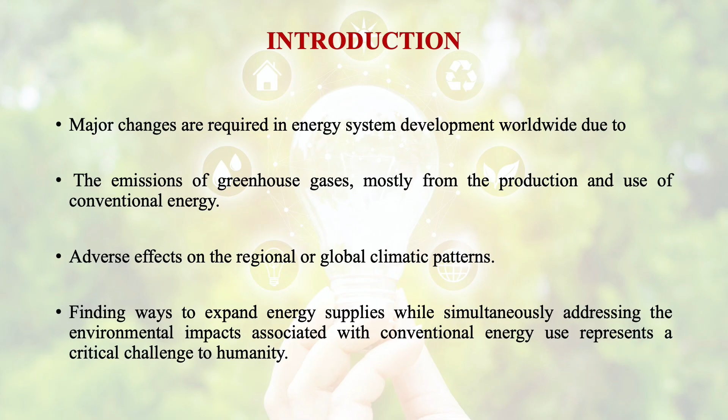Major changes required in energy system development worldwide are due to the emission of greenhouse gases, mostly from the production and use of conventional energy. These emissions are altering the atmosphere, resulting in adverse effects on regional or global climatic patterns. Finding ways to expand energy supplies while simultaneously addressing the environmental impacts associated with conventional energy use represents a critical challenge to humanity. What is the effect of energy on environment and health?

The resources and technology options available to meet these challenges are identified as energy efficiency, renewable energy sources, and advanced energy technologies. The relation between energy and social issues involves addressing the energy needs of the majority of rural people, especially the poor who cannot pay for commercially available energy.

A large majority of rural masses have very low ability to pay for energy in our country and require major structural changes. The productivity and income generating potential of a family is highly dependent on the availability of convenient and affordable energy. The contribution of a supply of affordable energy can help families and communities break out of the cycle of poverty.

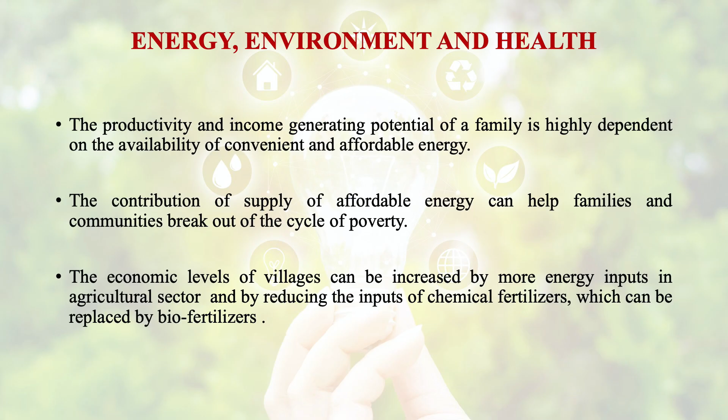The economic levels of villages can be increased by more energy inputs in the agricultural sector, such as increasing irrigated land area, and by reducing the inputs of chemical fertilizers, which can be replaced by biofertilizers such as biogas manure. So biogas is very important to make our villages self-reliant on energy.

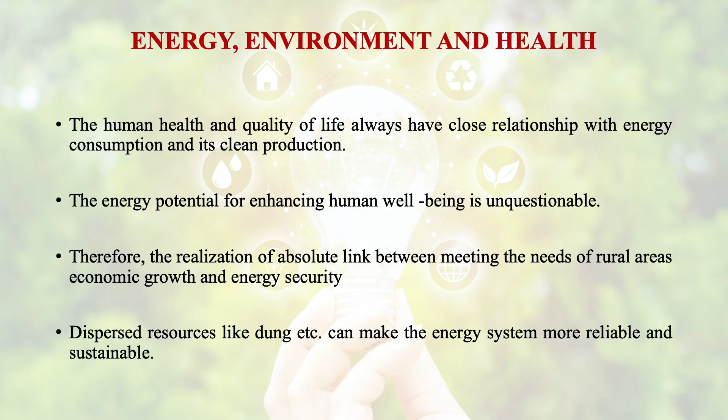Human health and quality of life always have a close relationship with energy consumption and its clean production. The potential of energy for enhancing human well-being is unquestionable. Therefore, realizing the link between meeting the needs of rural areas, economic growth, and energy security, dispersed resources like dung etc. can make the energy system more reliable and sustainable.

On the other hand, in developing countries, most inhabitants in rural areas are dependent on dung and organic residue as fuel for cooking and heating. This is the case, for example, in the treeless regions of India such as the Ganges Plain and Central Highlands, and it is not limited to India alone; the same condition exists in Nepal and other Asian countries. So the burning of dung, plant residue, and even wood is a considerable waste of plant nutrients. Burning wood is not at all a good or wise decision to make.

Other than land, labor, capital and water, energy and manure have also become crucial factors for the economic and social growth of villages. Efforts must be made to create self-reliant villages in terms of energy, with manure production as a byproduct through biomethanation technologies.

Local resources like cow dung, waste from agricultural lands, and waste from kitchens will be utilized there. This effort would provide a firm basis for economic and social development and long-term sustainability as well.

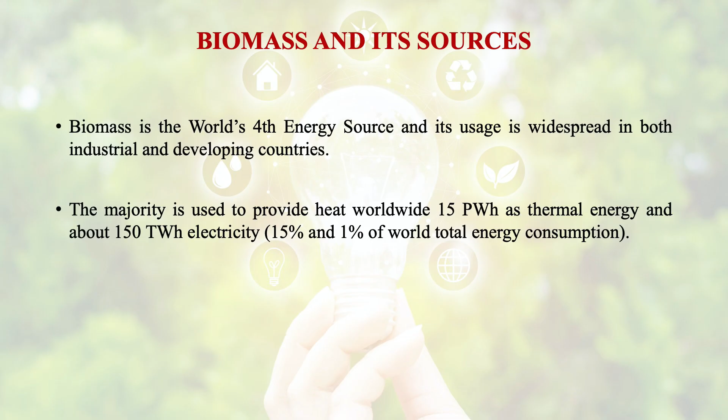As discussed in our previous modules, biomass is the world's fourth energy source and its usage is widespread in both industrial and developing countries. The majority is used to provide heat worldwide: 15 petawatt-hour as thermal energy and about 150 terawatt-hour electricity, which is 15% and 1% of world total energy consumption. This means 15% of thermal energy and 1% of electricity all over the world is provided by biomass.

The major resources which can be used for biogas production are animal manure, poultry waste, pig waste, night soil, municipal organic waste, agricultural residues, forest residues, aquatic plants like water hyacinth, organic waste water from industries such as food processing, milk processing, meat processing, hotels and restaurants, and sanitary landfills.

All these resources are generally organic waste. So what we need is a product that is organic in nature. It could be waste, because we are going to utilize waste and generate energy from the waste.

Biogas. What is biogas? Biogas technology refers to the production of a combustible gas known as biogas, and a value-added fertilizer also called slurry or sludge. The process used to produce biogas is anaerobic fermentation of organic materials under certain controlled conditions. The byproducts of anaerobic digestion are commonly referred to as biogas because of the biological nature of the gas production.

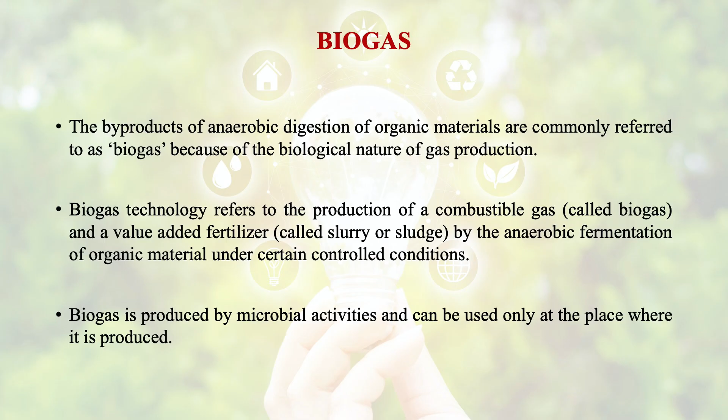It is produced by microbial activities and can be used only at the place where it is produced. Though we are developing biogas bottling plants as well, and transferring and transporting biogas in cylinders, for that we need to purify the gas and use it for the transportation sector. The best utilization of biogas at the least price is to use it at the place where it is produced, since the transportation cost associated with bottling is more.

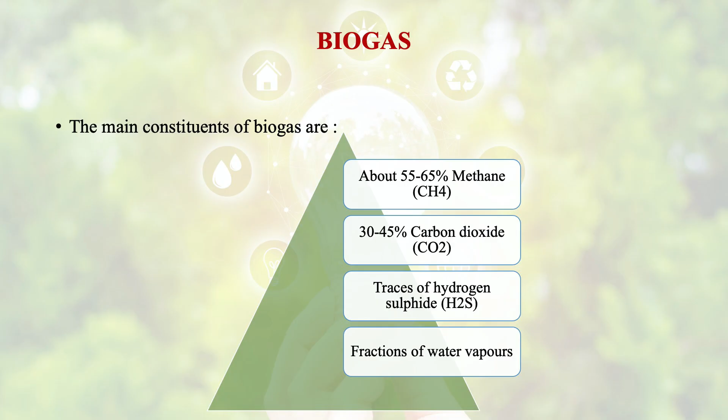What are the main constituents of biogas? Biogas consists of about 55 to 65% methane (CH4), 30 to 45% carbon dioxide, some traces of hydrogen sulfide, and a fraction of water vapor. Due to the presence of water vapor, the calorific value of biogas is somewhat lower.

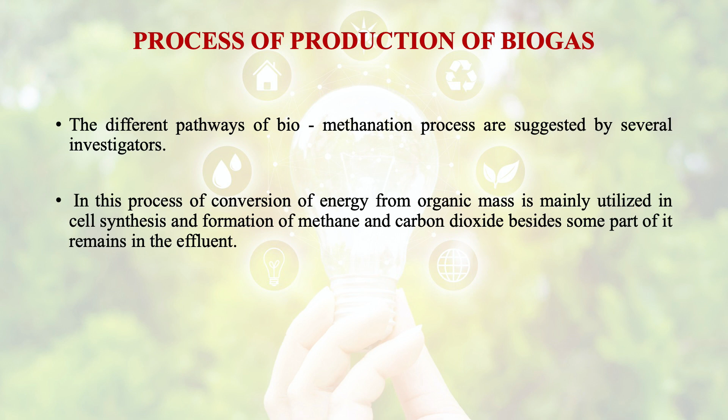What is the process of production of biogas? There are different pathways of the biomethanation process suggested by several investigators. At the macro level, energy conversion of organic waste occurs where energy from organic mass is mainly utilized in cell synthesis and formation of methane and carbon dioxide. Besides, some part of it remains in the effluent.

This process of biomethanation consists of three processes. First is hydrolysis, in which saprophytic bacteria convert complex organic compounds into less complex, water-soluble organic compounds. Hydrolysis is the first step in anaerobic degradation and also the rate-limiting step, from which we can determine the rate of production.

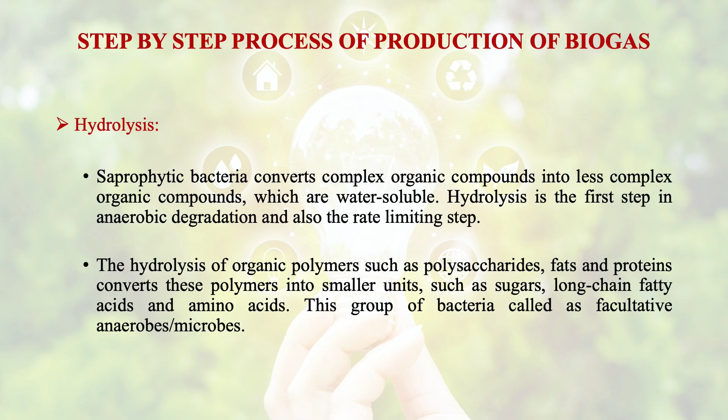The hydrolysis of organic polymers such as polysaccharides, fats and proteins converts these polymers into smaller units such as sugars, long chain fatty acids and amino acids. This group of bacteria is called facultative anaerobes or microbes.

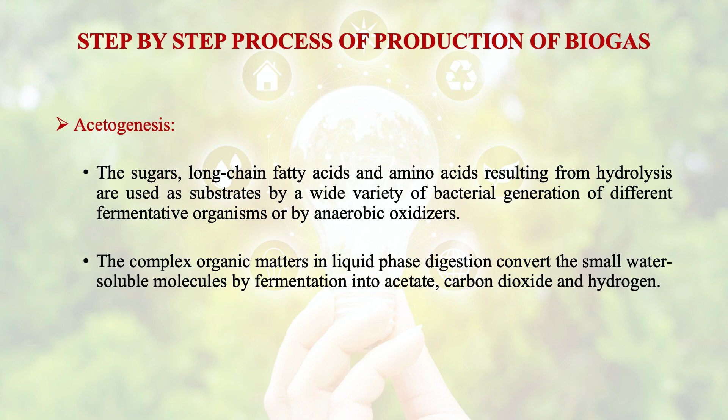The second process is acetogenesis. Here, sugars, long chain fatty acids and amino acids resulting from hydrolysis are used as substrates by a wide variety of fermentative organisms or anaerobic oxidizers. The complex organic matter in liquid phase digestion is converted into small water-soluble molecules by fermentation into acetate, carbon dioxide and hydrogen. The acid-forming bacteria also convert intermediate products to acetic acid, carbon dioxide and hydrogen.

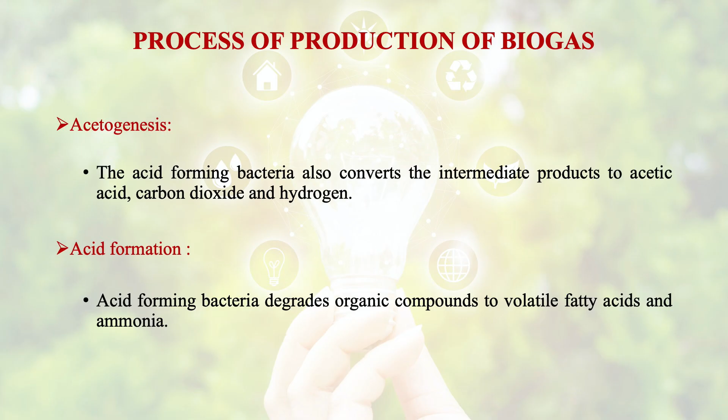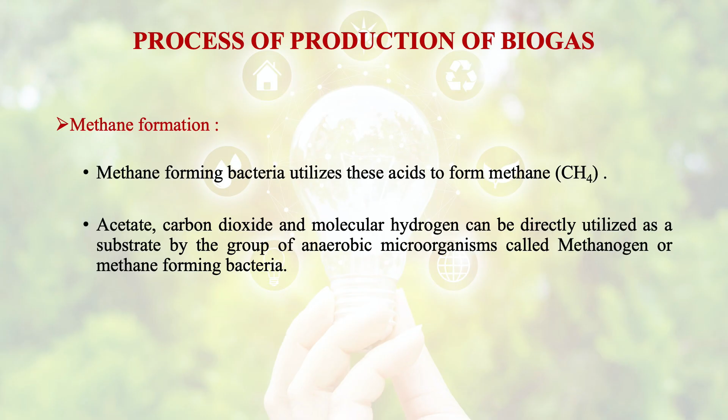Then comes acid formation, where acid-forming bacteria degrade organic compounds into volatile fatty acids and ammonia. The last step is methane formation, in which methane-forming bacteria utilize these acids to form methane. Acetate, carbon dioxide and molecular hydrogen can be directly utilized as substrates by the group of anaerobic microorganisms called methanogens or methane-forming bacteria.

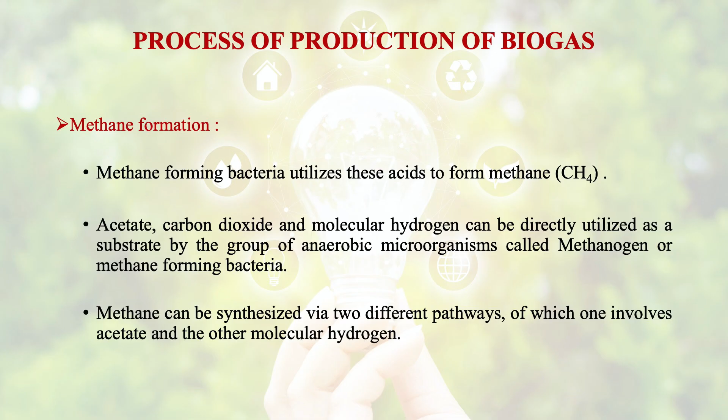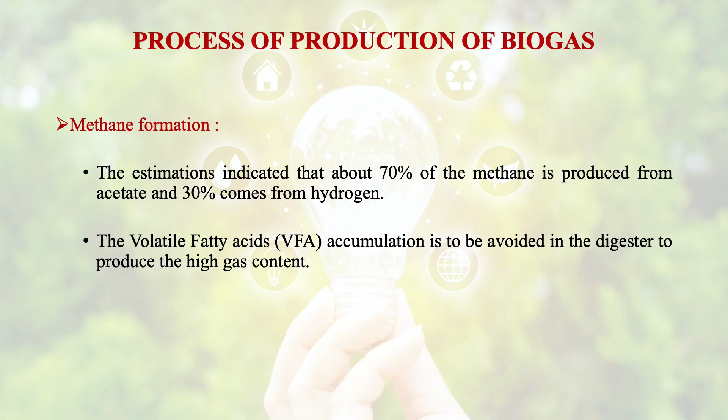Methane can be synthesized via two different pathways, one involving acetate and the other involving molecular hydrogen. Estimations indicate that about 70% of methane is produced from acetate and 30% from hydrogen. Volatile fatty acid accumulation must be avoided in the digester to produce high gas content.

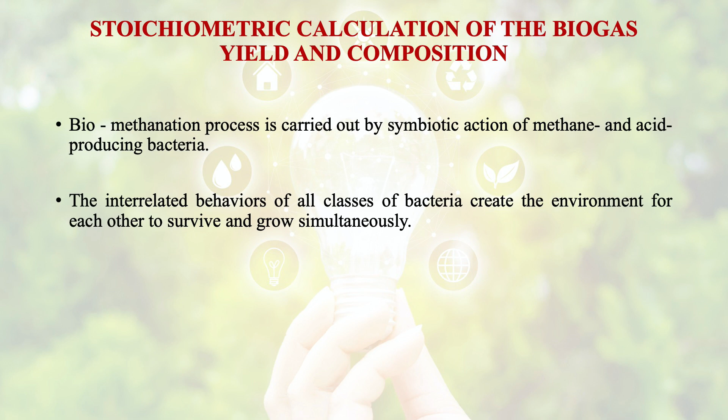Then there's the stoichiometric calculation of biogas yield and composition. Since this biomethanation process is carried out by the symbiotic action of methane and acid producing bacteria, the interrelated behaviors of all classes of bacteria create the environment for each other to survive and grow simultaneously.

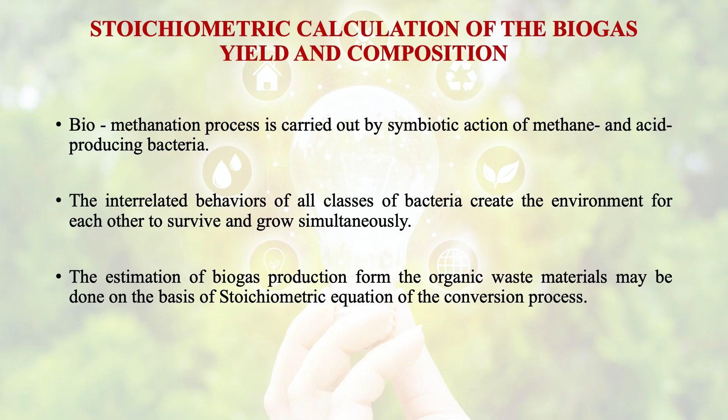The estimation of biogas production from organic waste materials may be done on the basis of the stoichiometric equation of the conversion process. A simple equation was considered by Gale and Ramkumar for calculating the theoretical yield of methane and carbon dioxide, which is biogas, produced by anaerobic digestion using Buswell's formula.

We consider this organic compound as CnHAOB, and when it reacts with H2O, we calculate the moles of water on the basis of N, where N is the number of carbon atoms. The moles of water will be 4n minus A minus 2B, where N is number of carbons, A is hydrogen, and B is the subscript for oxygen.

Suppose we have C6H12O6, then N is 6, A is 12, B is 6. So using 4n minus A minus 2B, we get the moles of CH4 as 4n plus A minus 2B, divided by 8, and moles of CO2 as 4n minus A plus 2B divided by 8. This means we get equal moles of CH4 and CO2.

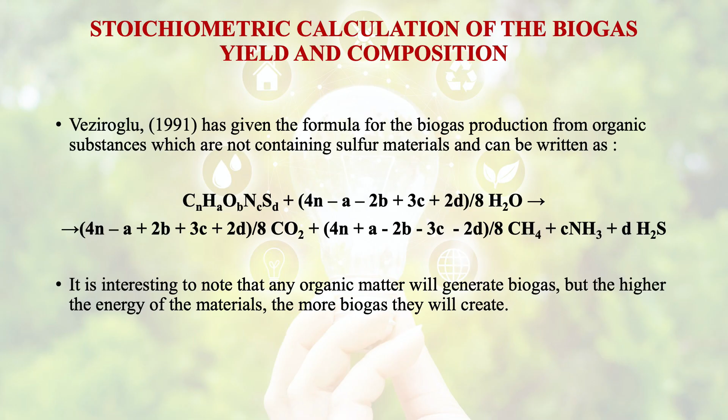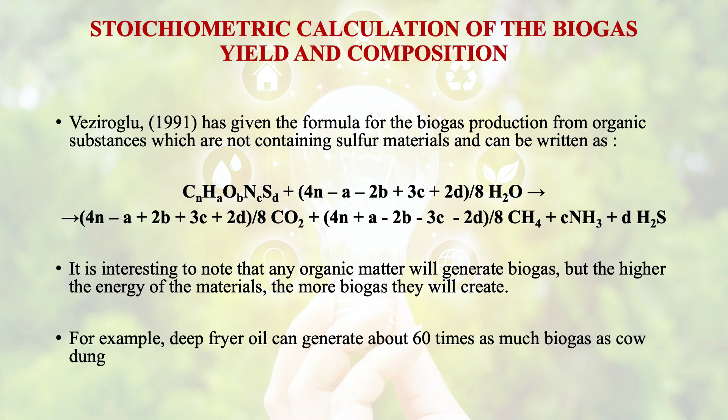We obtain these values of N, A, B, C, D by proximate analysis or ultimate analysis. Though every organic matter will generate biogas, the higher the energy of the material, the more biogas it will create. For example, deep fryer oil can generate about 60 times as much biogas as cow dung for any system, depending on the energy content of that particular material used as organic waste.

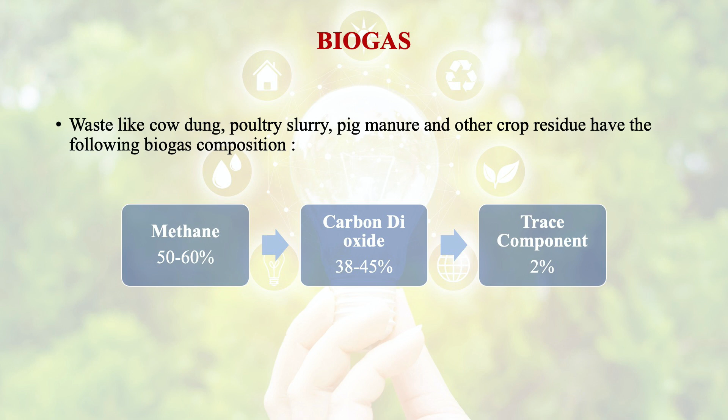For biogas, we can use waste like cow dung, poultry slurry, pig manure, and other crop residue. These all have the following biogas composition: methane about 50 to 60%, carbon dioxide 38 to 45%, and trace components about 2%, which could be hydrogen, hydrogen sulfide, non-methane volatile organics, etc.

The commonly used fuels in the transportation sector or as boiler fuel are biogas, dung cake, firewood, diesel, and kerosene. Comparing their calorific value and thermal efficiency, biogas has 4000 to 5000 kilocalorie per meter cube calorific value, while diesel has 10,550 kilocalorie per kg. The thermal efficiency for biogas is 55 to 60%, while for diesel it is 60 to 70%.

So we can see that if we compare biogas with other fuels, it is at par. We will find it at par, while the calorific value for dung cake is only 1900 to 2100 kilocalorie.

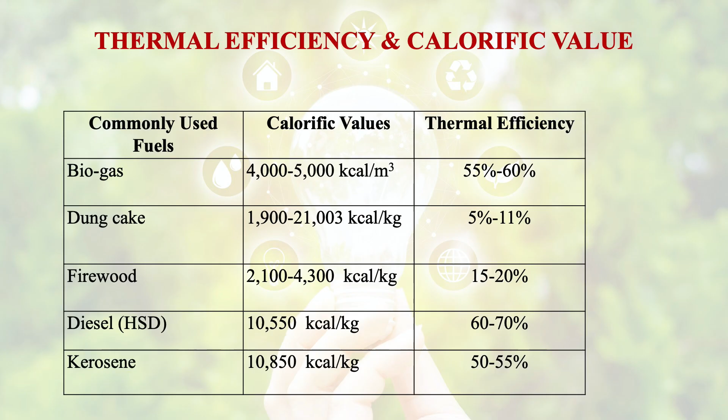What will be the thermal efficiency? 5 to 11% only. Firewood has 2100 to 4300 kilocalorie per kg, and thermal efficiency will be low, 15 to 20%.

So we can see that this biogas is at par with all the other fuels.

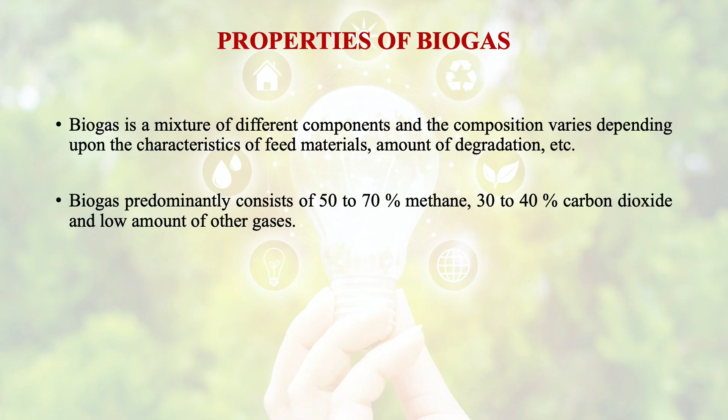What are the properties of this biogas? It is a mixture of different components and the composition varies depending upon the characteristics of feed material, that is the type of waste used for the production of biogas, amount of degradation, etc. Biogas predominantly consists of 50 to 70% methane, 30 to 40% carbon dioxide, and a low amount of other gases. Methane is a combustible gas.

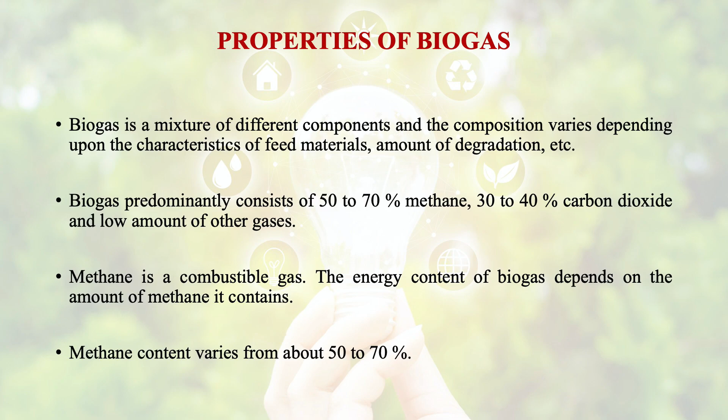The energy content of biogas depends on the amount of methane it contains. Methane content varies from about 50% to 70%. The interest in biogas as an alternative fuel comes mainly from its clean burning qualities and its domestic resource base.

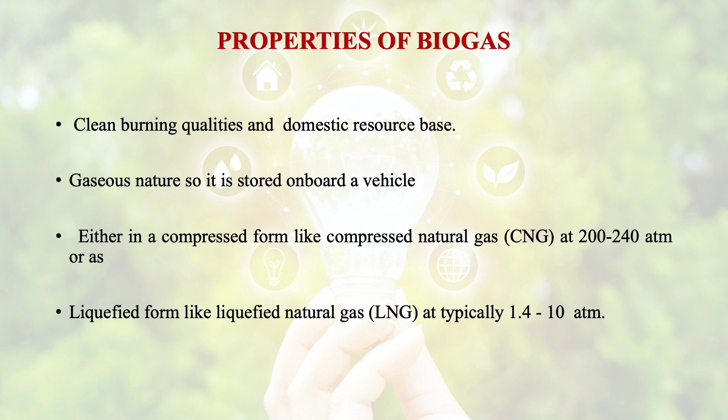Because of the gaseous nature of this fuel, it must be stored on board a vehicle in either a compressed form like CNG at 200 to 240 atmospheric pressure, or a liquefied form like liquefied natural gas LNG at typically 1.4 to 10 atmosphere.

It is produced in biogas plants or landfill sites, and is primarily composed of methane and carbon dioxide with smaller amounts of hydrogen sulfide and ammonia. Trace amounts of other gases like hydrogen, nitrogen or carbon monoxide are also present in the biogas. Usually the mixed gas is saturated with water vapor and may contain dust particles as well.

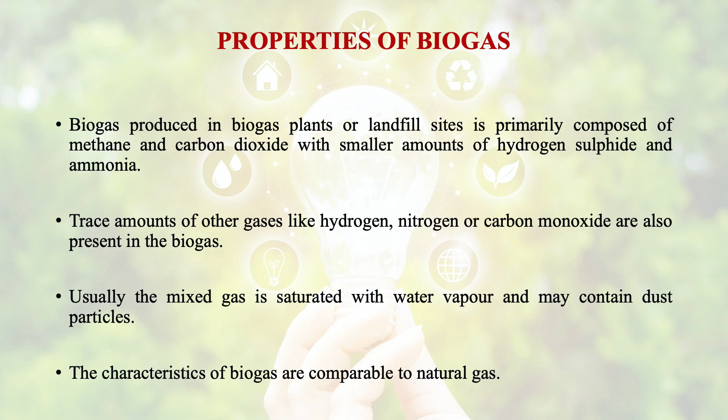The characteristics of biogas are somewhat comparable with natural gas. The energy content is defined by the concentration of methane. 10% of methane in the dry gas corresponds approximately to 1 kWh per cubic meter.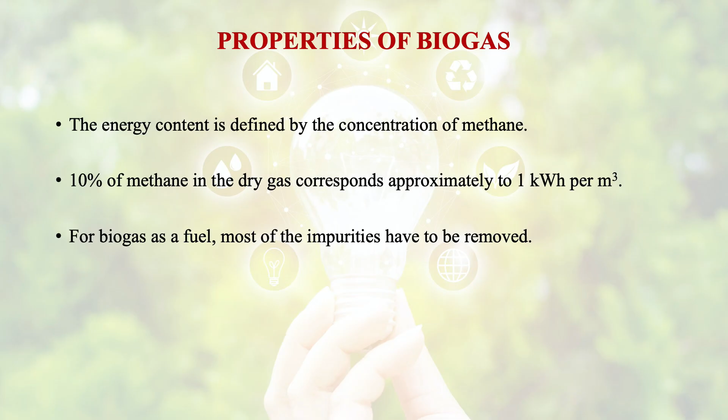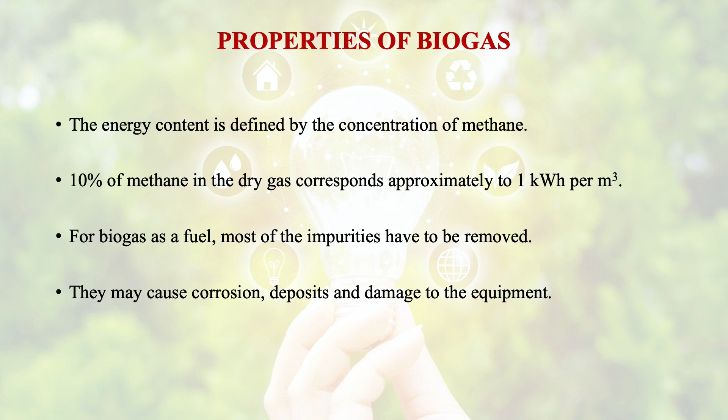For biogas as a fuel, most of the impurities have to be removed because they may cause corrosion, deposits and damage the equipment. Substances such as hydrogen sulfide, water, carbon dioxide, halogen compounds like chlorides, fluoride, siloxanes, aromatic compounds, air, oxygen and nitrogen need to be removed. For the use of biogas in ordinary Otto engines, that is petrol engines, biogas must be upgraded.

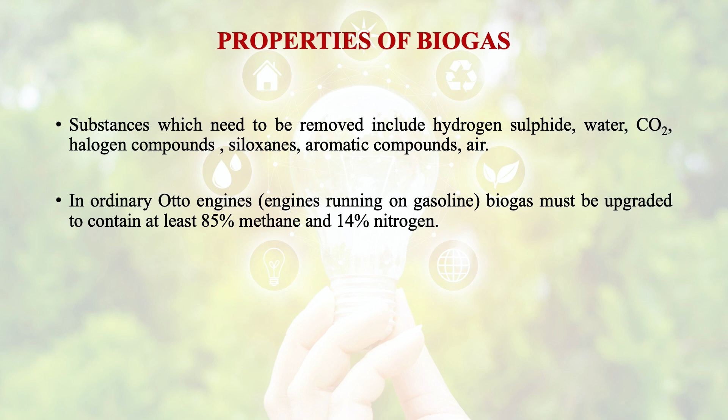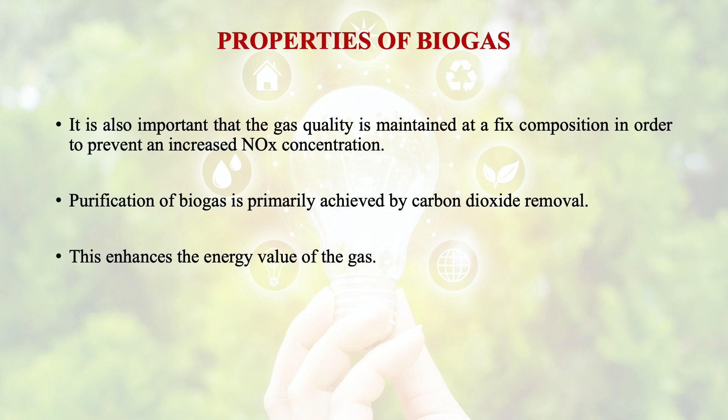Biogas must be upgraded to contain at least 85% methane and 14% nitrogen. This is the minimum fuel quality for which natural gas fueled vehicles are approved. It is also important that the gas quality is maintained at a fixed composition in order to prevent increased NOx emission. Purification of biogas is primarily achieved by carbon dioxide removal, which enhances the energy value of the gas and helps increase the calorific value.

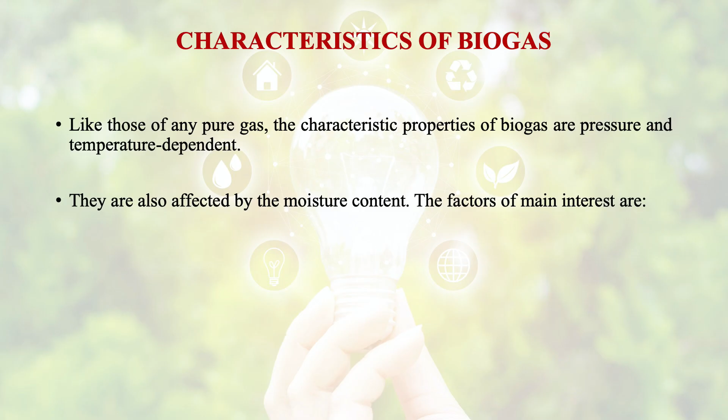Like those of any pure gas, the characteristic properties of biogas are pressure and temperature dependent. These characteristic properties are fully dependent upon temperature, pressure and moisture content as well. The factors of main interest are change in volume as a function of temperature and pressure.

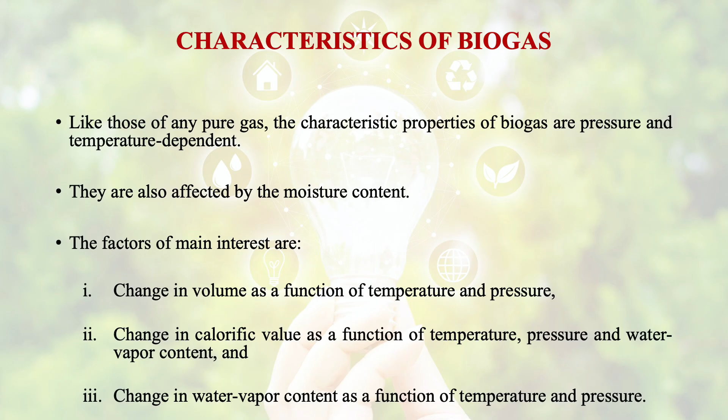Change in calorific value is a function of temperature, pressure, and the calorific value or energy content also depends upon the moisture content, so water vapor content comes in here. So change in calorific value is a function of temperature, pressure and water vapor content, and change in water vapor content is again a function of temperature and pressure.

The calorific value of biogas, in terms of kilowatt hour, is near about 6 kilowatt hour per cubic meter, and it corresponds to about half a liter of diesel oil. The net calorific value depends on the efficiency of the burners or appliances where it is used. Methane is a valuable component under the aspect of using biogas as a fuel.

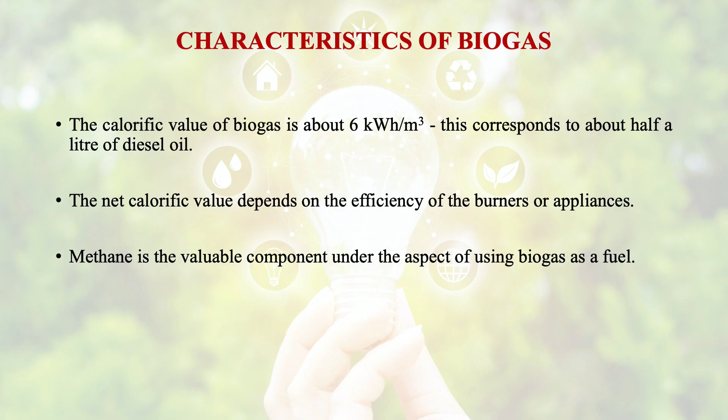Now comes the efficiency of biogas production. The efficiency of biogas production is measured in terms of yield as a fraction of the theoretical yield of gas. The biogas production per kg of raw material may be a good indicator for the performance of the digester.

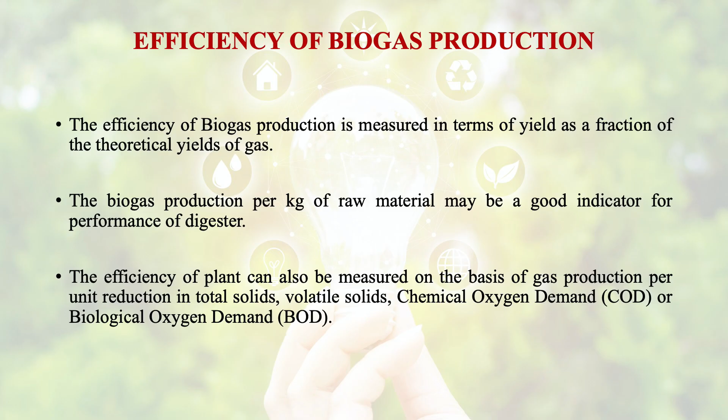The efficiency of plants can also be measured on the basis of gas production per unit reduction in total solids, volatile solids, chemical oxygen demand or biological oxygen demand. The total solids and volatile solids are normally used to measure the efficiency as biomass is a solid material.

The efficiency of biogas production depends on the retention time, that is the percentage of daily input of biomass related to the total volume.

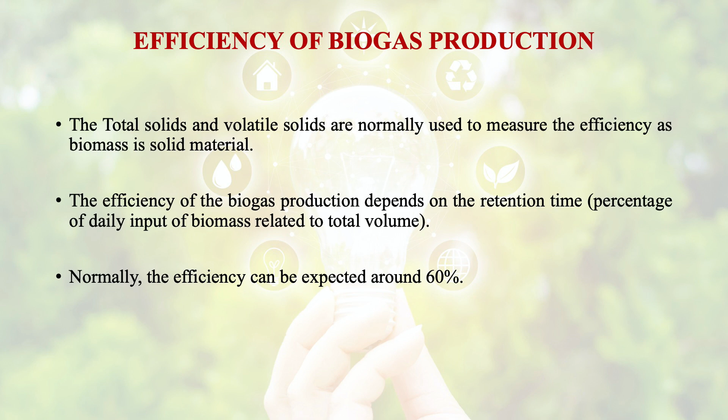Now comes the efficiency of biogas production. Normally the efficiency can be expected around 60%. The biogas production also depends on the biological oxygen demand in the wastewater. The BOD reduction will generate 0.8 cubic meter of biogas for each kg of BOD removal.

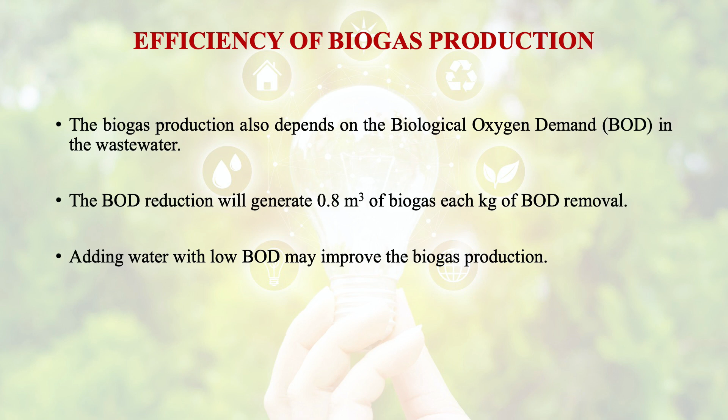Adding water with low BOD from the end of the anaerobic process will dilute the high inlet biological oxygen demand and improve the biogas process.

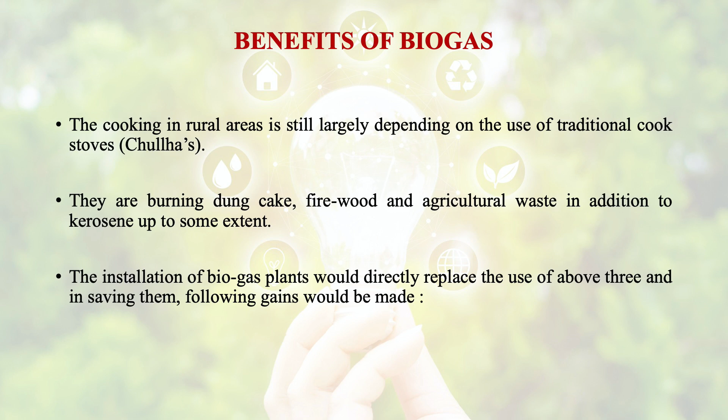What are the benefits of biogas? Cooking in rural areas still largely depends on traditional cook stoves, called chulha, generally burning dung cake, firewood, and agricultural waste, along with kerosene to some extent. Installation of biogas plants would directly replace the use of these, and in doing so, gains would be made: reduction in pollution due to burning of dung and other biomass materials.

Dung can be conserved if biogas plants are used. Again, the dung after digestion in a gas plant preserves more of nitrogen, phosphorus and potash.

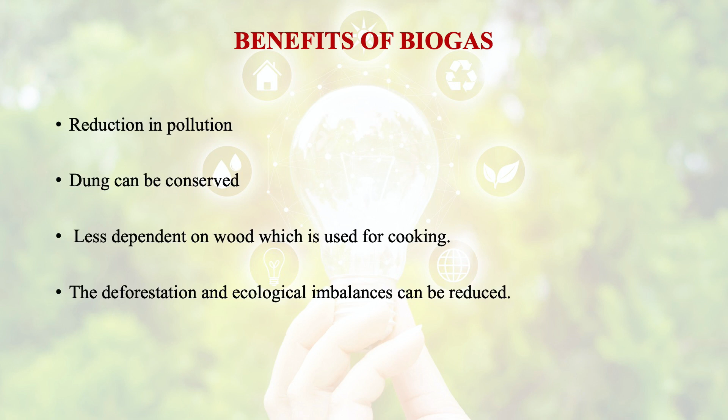The rural people would not be dependent on wood used for cooking. Deforestation and ecological imbalances can be reduced. In rural areas, instead of kerosene, biogas can be used for lighting. This would reduce dependence on fossil oil directly and save foreign exchange.

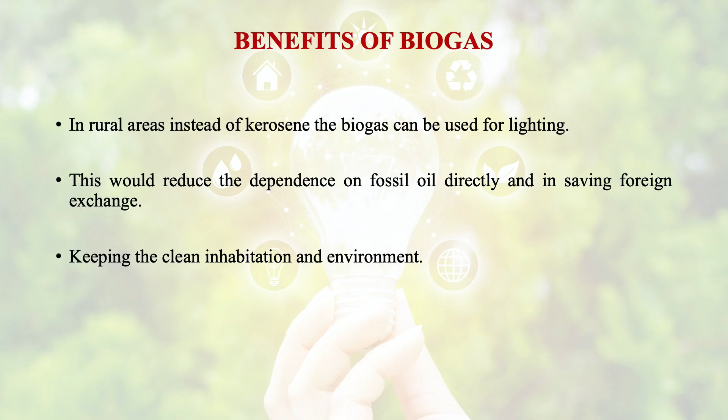The most important benefit would be keeping the habitation and environment clean. Human beings can be saved from bacterial infections and other insects. The combustion of biogas produces carbon dioxide, a greenhouse gas.

The carbon in biogas comes from plant matter that fixed this carbon from atmospheric carbon dioxide. Thus, biogas production is carbon neutral and does not add to greenhouse gas emissions. Further, any consumption of fossil fuels replaced by biogas will lower carbon dioxide emissions.

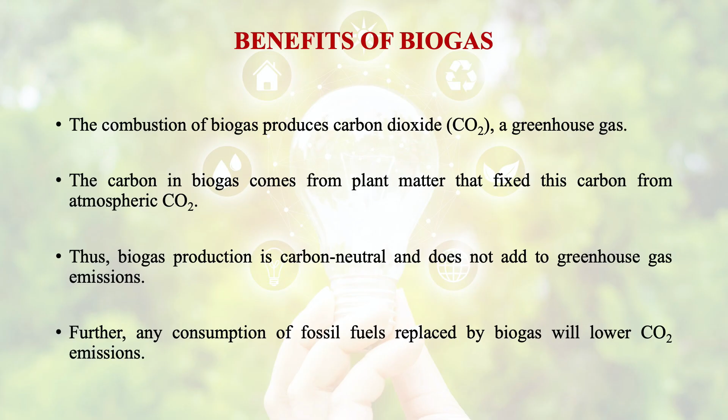Nevertheless, there is huge potential for biogas as an alternative and renewable fuel. In densely populated areas, the effect of reduced emissions from transportation brings a higher environmental benefit than production of electricity.

The main obstacle in biogas production as an alternative fuel is the high cost of upgrading equipment, which is too expensive for small scale systems. Some other limitations include few technological advancements. An unfortunate disadvantage of biogas today is that the systems used in its production are not efficient.

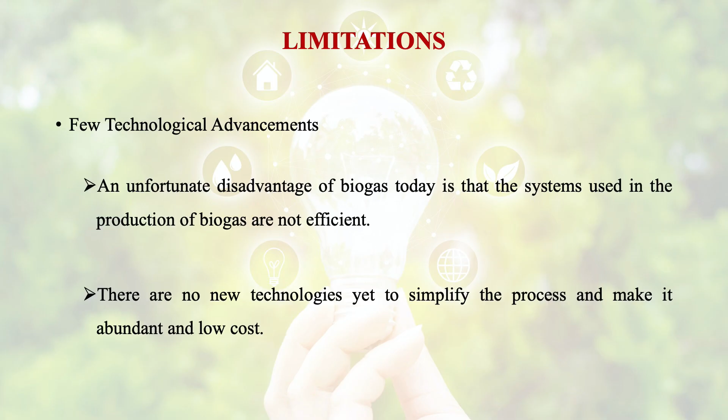There are no new technologies yet to simplify the process and make it abundant and low cost. This means large-scale production to supply a large population is still not possible. Although the biogas plants available today are able to meet some energy needs, many governments are not willing to invest in this sector.

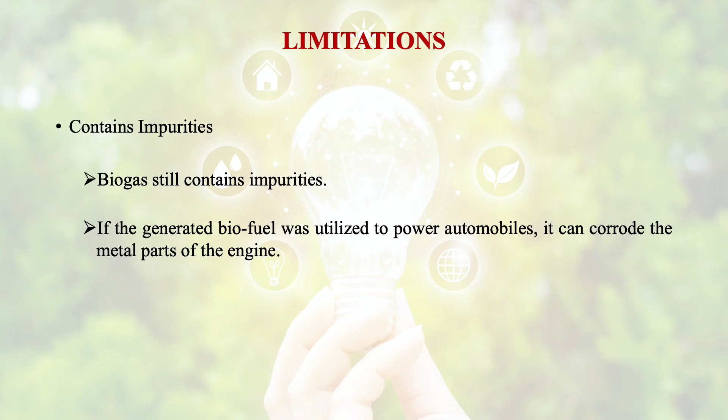Biogas contains impurities. After refinement and compression, it still contains impurities. If the generated biofuel was utilized to power automobiles, it can corrode the metal parts of the engine, leading to increased maintenance cost. The gaseous mix is much more suitable for kitchen stoves, water boilers, and lamps.

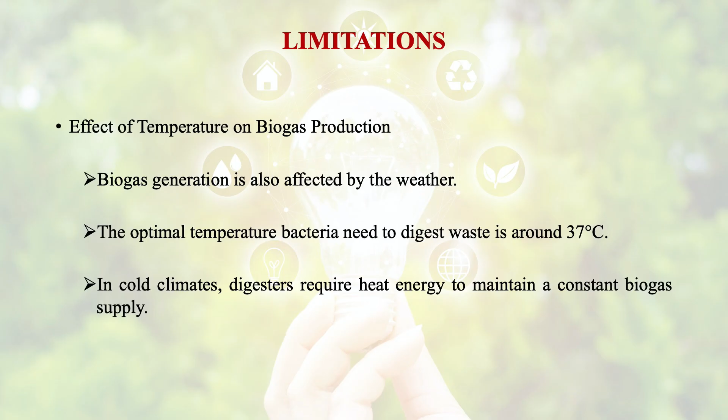Next, the effect of temperature on biogas production. Like other renewable energy sources, such as solar and wind, biogas generation is affected by weather. The optimal temperature bacteria need to digest waste is around 37 degrees centigrade, whereas in cold climates, digesters require heat energy to maintain a constant biogas supply.

It is less suitable for dense metropolitan areas. Another disadvantage is that industrial biogas plants only make sense where raw materials are in plentiful supply, such as food waste and manure. For this reason, biogas generation is much more suitable for rural and suburban areas. So these are certain limitations for the application of biogas technologies.

Let us summarize this module. We have discussed that biogas originates from bacteria in the process of biodegradation of organic material under anaerobic conditions—anaerobic meaning without air. The natural generation of biogas is an important part of the biogeochemical carbon cycle.

We discussed methanogenesis, and that the gases methane, hydrogen and carbon monoxide can be combusted or oxidized with oxygen—air contains 21% oxygen. This energy release allows biogas to be used as a fuel.

We also discussed that biogas is generated and is a source of renewable energy, and can be used as a low-cost fuel in any country for any heating purpose such as cooking. It can also be utilized in modern waste management facilities where it can run any type of heat engine to generate mechanical or electrical power.